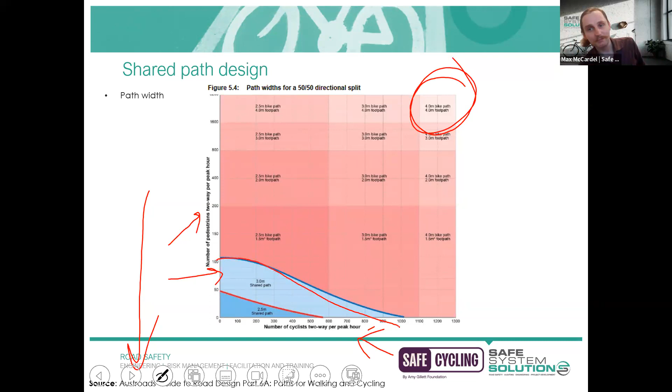Your shared path here is all this in the blue, and as you can see, it's relatively lower numbers where that could be seen as appropriate.

It's not quite as easy to measure as that. I do encourage you to flick through and review the types of definitions they've got in there, but you'll see it is generally quite vague. The idea is a local access path would not be considered to have a throughput of cyclist activity.

It's going to provide probably residential access. I guess you could think of it as similar to local streets. It's got that same kind of feeling to it.

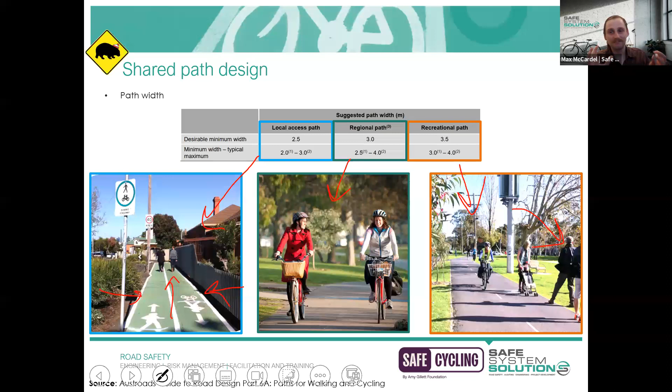But as I said, take all of these definitions with a grain of salt because they're not clearly defined and demarcated. So it can be used as a starting point, but it's not necessarily going to be able to solve which width to choose.

When we talk about the gradient, we're generally thinking about the uphill gradient, how comfortable it is for a cyclist to ride uphill. Personally, I'm a regular cyclist, and I tend to avoid routes that have lots of hills because I don't have the stamina for it. I'd go out of my way, do a detour to avoid a really steep section.

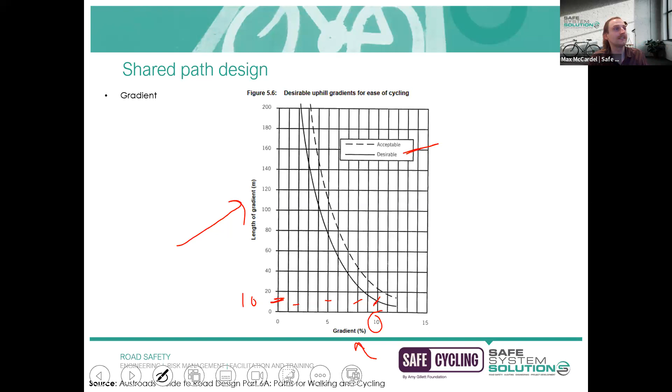A lot of speed discussion. Speed, yes. Skid resistance, stopping distance, visibility, sightlines. Pedestrian conflict points.

A lot of conflict. Yep, speed conflicts. All right, well certainly lots of answers there coming through, Ilsa. Yeah.

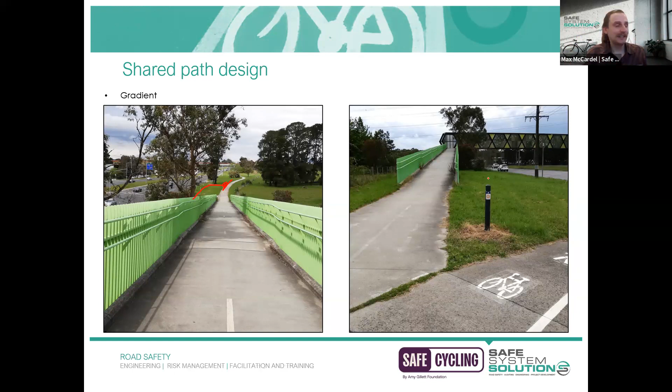So I wouldn't be surprised if, in future editions of Austroads and other guideline documents, we see wider operating widths to play with. These operating widths were designed based on what's considered an average bicycle, but there seems to be quite a diversity now on our networks as to what that exactly looks like. We've got cargo bikes, trikes and tricycles, recumbent bikes, and lots of different styles of bicycles. I'd imagine that would play a role in trying to redefine what this average bicycle looks like. For the time being, feel free to use this as a reference to help underpin any decisions you make within this space.

I should have mentioned this last graph at the bottom, to do with the speed of cyclists as well. Generally, if you're talking about shared paths, a 20-kilometer-per-hour speed is probably a reasonable assessment. At 30 kilometers per hour, they're probably going to be on the road instead. But obviously lower speeds too, for other users who don't feel comfortable traveling at that speed. I'd say 20 to 25 kilometers per hour would be a reasonable assessment for shared paths with cyclists.

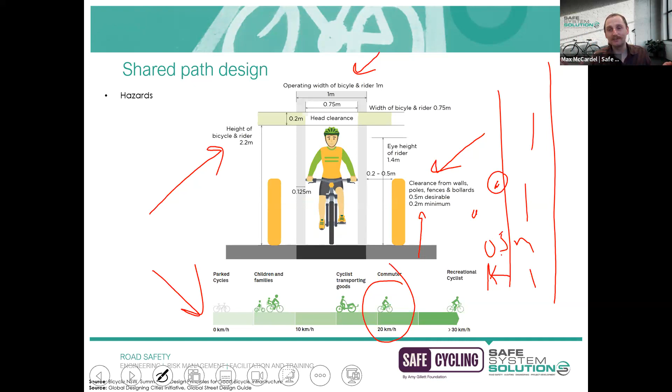The source for that second image is the Global Designing Cities Initiative. We haven't provided that one within our resources package on the LMS, because the Global Street Design Guide is set up so they like to see who's downloaded their guidelines - you have to put in your details and say where you're from. It's obviously an international organization, but it's really, really good. It's something like a 300 page, 600 meg document - really big, but completely comprehensive about what everyone around the world is doing within the cycling space and what treatments you can look at. So I'd strongly encourage you to download that one.

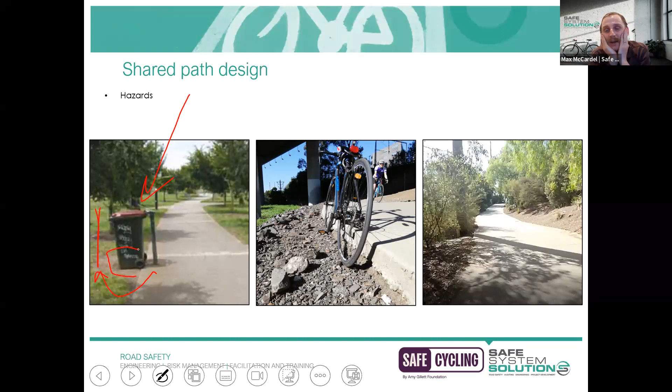Some common hazards we do see adjacent to shared paths can be roadside hazards, or roadside furniture - things like bins. A perfect example is where, if we'd just flipped this pole to go here and created a little bin outstand or bin bay, that could have helped reduce that as a risk. So that's a common hazard to find.

Another one is where the shared path's adjacent surface is not level - you might have a drop-off point. The real quick and easy fix there is just to ensure all your shared paths are batted up to the surface level so you don't have that drop-off, because if you're riding something with narrow tires, like a road bike, it's incredibly unlikely you'd be able to get back up onto that shared path.

You'd be in quite a lot of trouble there. The final one here is there's actually a utility pole right adjacent the edge of this shared path. So as a general rule of thumb, if we've done any risk identification and mitigating measures, things we want to be looking at is if we can remove the risk altogether—so relocate that utility pole or relocate the shared path to get us away from that hazard. Where that's not really feasible, you can look at going the next level down, which is trying to delineate or raise awareness of the hazard.

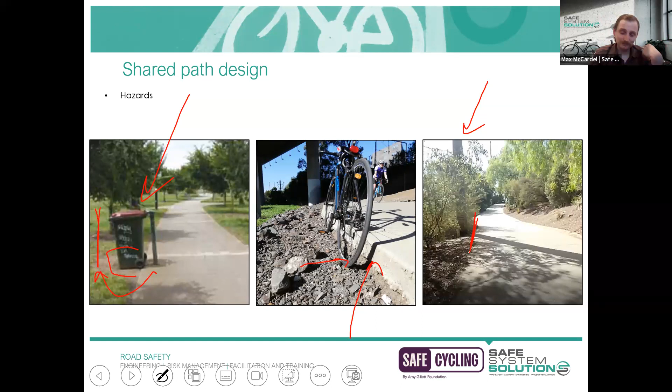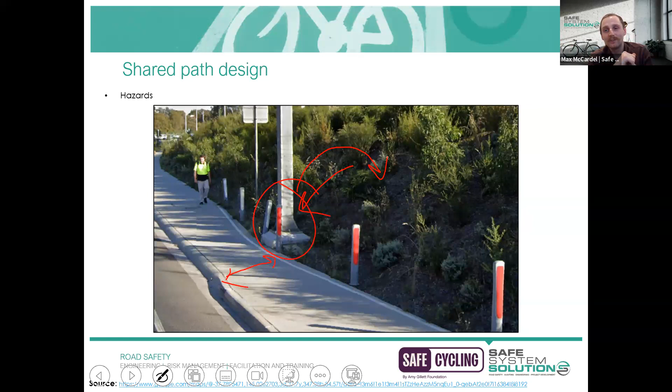Here's an example of how that could be achieved through the use of these flexible paddles or flexible bollards. This is a shared path, and as you can see, it has been narrowed here—there's a pinch point because of this gantry column. In a perfect world, during the development of this project, this may have been picked up by an auditor or during the design review process, suggesting we push this closer into the batter and build some retaining walls to keep all that earth back, just to ensure we can keep the shared path, because putting the paddles there and narrowing the path is certainly not removing the hazard. It's just making it a little bit more obvious.

Quite technical, this slide, and I appreciate not everyone may have seen sightline calculations before. The reason we include it is just to remind designers that there are actual sightline requirements and calculations for cyclists. For those that have had to do sightline calculations—minimum stopping distance, stopping sight distance, intersection sight distance—generally that's from the perspective of motorists or heavy vehicles in some instances. There are also separate calculations for cyclists, with very similar formulas though.

Things you'll be considering: what would be the speed? This is where you can jot down any of your assumptions. So as before, if it was a shared path on kind of flat terrain, you may assume a 20 kilometer per hour speed would be a reasonable assumption. You generally always take the worst case scenario, being wet conditions for the coefficient of friction, and the grade of the path needs to get factored in there as well. I'm not going to go through this whole thing—it's just to throw out there for designers as a reminder that we do have sightline requirements for cyclists.

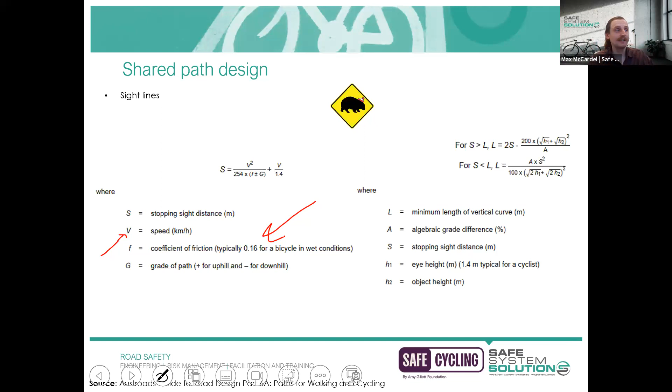And this has got to do with the horizontal sightline. I'll go to the next slide, which will explain why this is important. If you had a cyclist on the right of the screen there, traveling around a bend or around a corner, they do need to have adequate sight lines to be able to spot any objects or hazards that may be in their path, and be able to stop in time, basically.

Hazards could be a serious defect in the path, equivalent to a pothole. There could be a log that's fallen over. There could be a cyclist that's fallen over that needs help or attention or something like that. So that's the reason we perform these sight distance checks, is just to ensure we're providing that stopping distance.

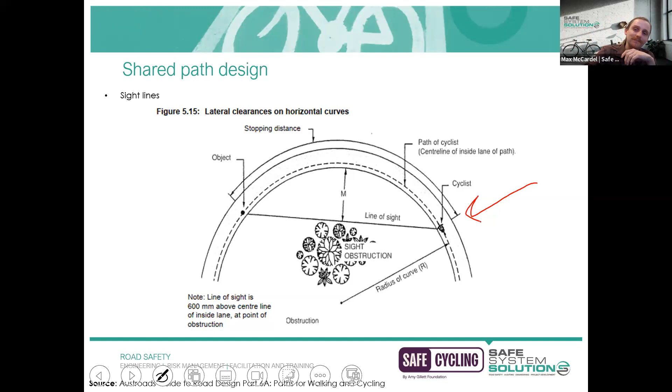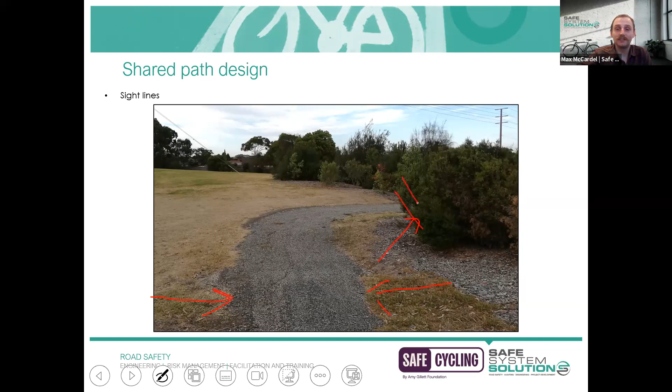As a real life example here—believe it or not, this is a shared path. It doesn't look like it, but this is sealed. And because of this vegetation here, it's quite difficult to be able to see around that bend. If you were traveling at speed and there was a hazard there, it could potentially be hidden by that. So a recommendation here would be to trim back the vegetation just to open up those sight lines.

Elsa, yes, we have a question about e-bikes. Someone's asked that with e-bike speeds now being about 25, should we be going for that rather than the 20? That's something you and I have briefly discussed before. What's your opinion, Elsa?

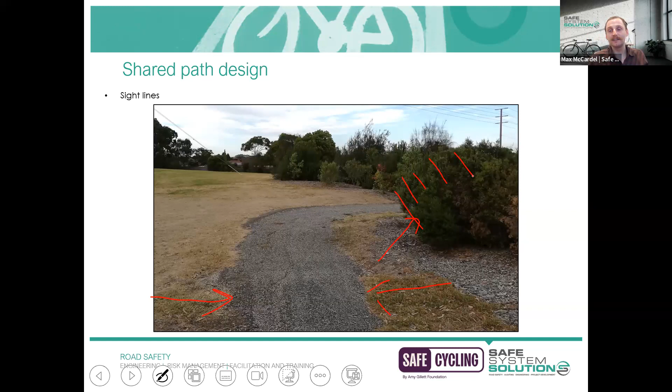It's tricky. I think in shared use paths, maybe that would be a good one to consider—two-way especially. Generally where you do have lots of e-bikes, you would see them taking that upper limit or going to what would legally be able to travel at. So I would agree if you're seeing those users within the space to perhaps go for the higher limit there, which will impact things like these sightlines, how much sightline distance you need to provide them. Thanks for the question, thank you, Stephanie.

Alrighty, we'll get stuck into fencing now. Once again, there are specific requirements as to when you should be installing fences. One is to do with what is the adjacent drop-off. So if it's a really big fall or a really small fall, how can we manage that? The other one is to do with the steepness of the batter. If it's like a cliff face that you're riding against, that's probably going to need a fence. But if it's just very flat land, obviously no fence required.

Just to run you through this, so you've got an idea of how this works, there's two categories of fencing, which in my personal opinion is overly complicating this topic. But they've got this idea of a partial barrier fence and a full barrier fence. I'll show you exactly what those two examples mean in a second. If we look at the left-hand diagram here, we've got this note of X. X is the distance from the edge of the shared path to where the vertical drop is situated. Then we've got the dimension Y, which is what is the vertical fall, the drop.

We can see in the first scenario here, if X is less than 2 meters and Y is less than 250 mil, it's saying a fence is not required, with the asterisk saying instead what you want to do is batter off the surface. So instead, just get some fill material and fill that in. Don't worry about a fence, just fill that in. Pretty pragmatic solution there.

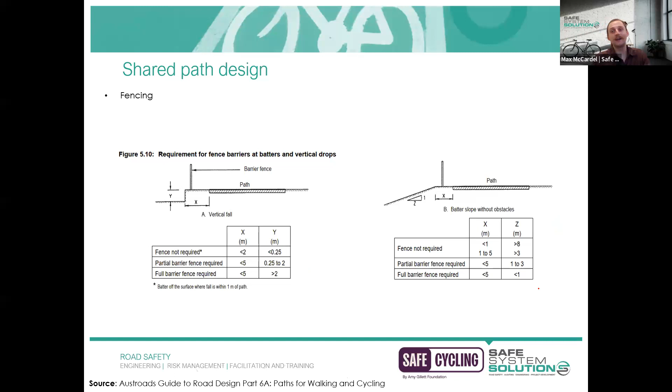That smooth rail, or smooth deflection rail, is intentionally situated about 1.2 meters to 1.5 meters, which is roughly a cyclist's elbow to their shoulder. So as you're riding along, if you were to become errant and strike this fence, your shoulder to your elbow is the part that's going to hit it, not your handlebar and not your wrist that could then get snagged on any members. It's deliberately designed at that height to maximize the chances of a cyclist staying on their bike and hopefully continuing to ride along, as opposed to getting snagged on any vertical members or losing control and stability. So that's often referred to as cycle-friendly fencing, but it's just this idea of one smooth, continuous rail that juts out.

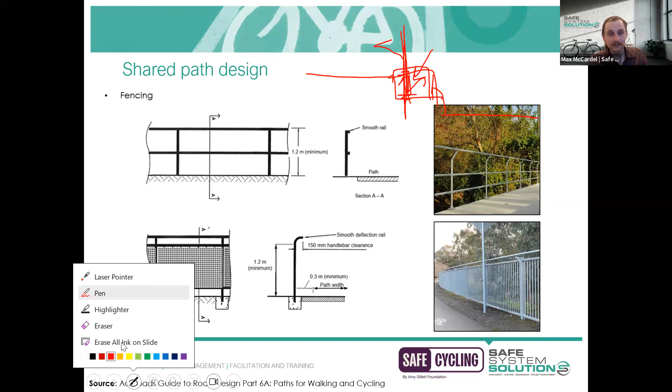I can see another question came through about entry and exit splays of fencing, which is a very good idea. For those not familiar with the term, if you're on a shared path and draw a straight one like this, with a fence relatively close to the edge of the shared path there.

If you kind of deliberately put it parallel to start with, it can have this effect for cyclists where if you're riding up here, you actually want to veer away from it. The term used in road design context is the shy line effect.

Barrier systems on roads tend to have this splay as well. It's the same kind of principle here, where you'd provide a splay or angle the start or end of the fence treatment off a bit, so cyclists don't feel the need to veer out of their lane or away from that feature and potentially encroach into other spaces. So yes, that's a very good consideration.

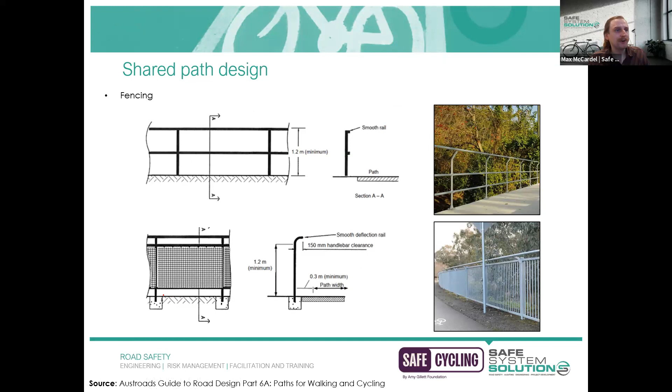And yes, I can see the sign in the bottom photo isn't in a great spot. I agree with you, Craig - good pickup, I was going to mention that. This sign here is very interestingly installed on the shared path side of things.

So theoretically, if you were riding and collided with this fence, engaged with the smooth deflection rail and run along that rail, you'd collide straight into that sign. That's not a great positioning. Instead, any of that furniture - signs and things - should be put on the other side of the fence, so you don't get careened straight into another hazard.

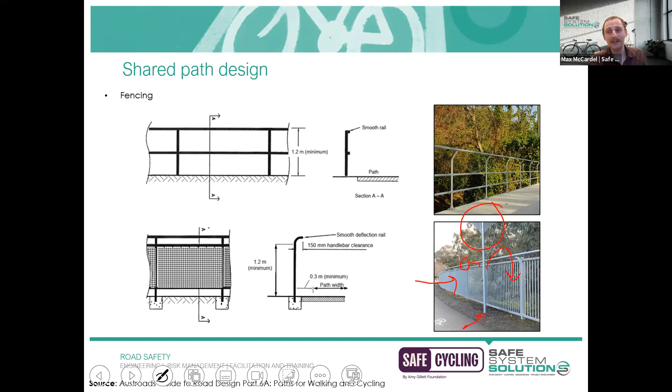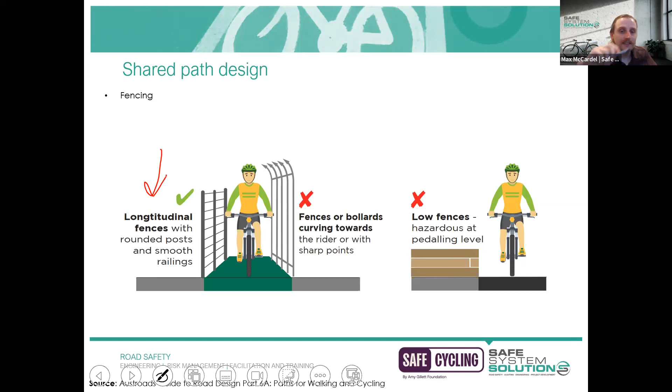I'll go through this last slide and then we'll pause for a break. So last little point on fencing - we've already talked about longitudinal fencing. We want to make sure we've got smooth rails and things like that. We don't want to be using any fences that curve towards the rider or have any sharp points.

There are examples where they curve outwards - it can be a nice architectural feature. For those that curve outwards, the need for a smooth deflection rail isn't quite as significant, because it's less likely you're actually going to strike that. But TMR have got some information if you're after more detail on when to apply specific fence types - there's a lot of information in the TMR document.

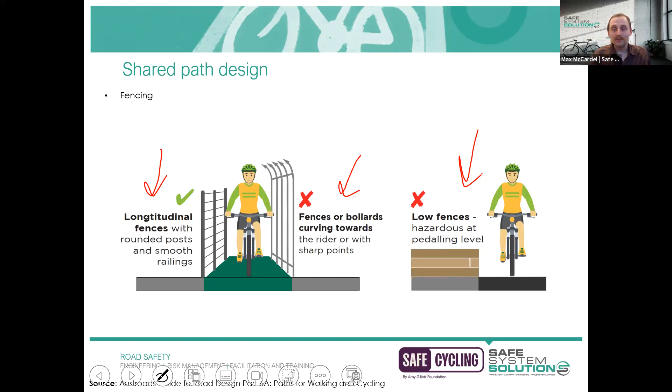The other example I wanted to mention is low fences. Things like planter boxes are a really common one - they can actually be a hazard for a cyclist's pedals. Around the 200 millimeter mark, anything above that is considered a pedaling hazard, which can cause a cyclist to lose balance or become destabilized. So that's something to also consider - anything within that space could be deemed a hazard.

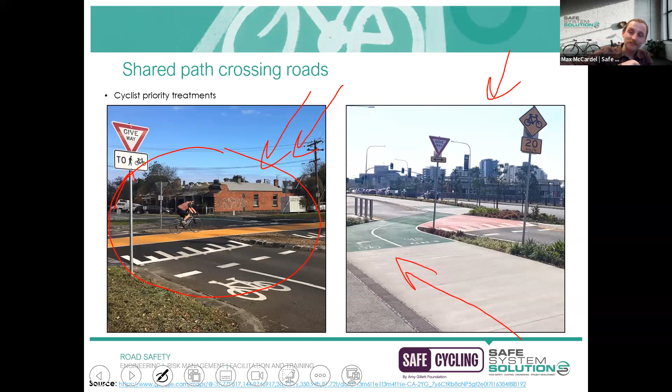If you imagine riding in the right-hand example and a vehicle was also traveling in the same parallel path direction, they may not necessarily appreciate that you're about to cut in front of them and go across them. So that's one aspect, the cognitive work involved. But also, if you were that cyclist trying to turn right and look over your shoulder to spot any motorists traveling at speed who may ignore the give way sign, it's just really, really hard to do.

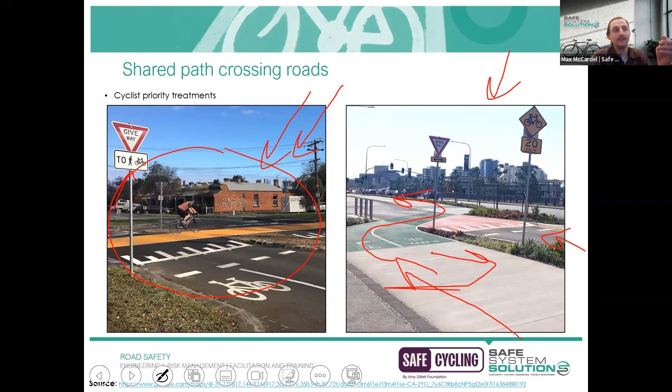So perpendicular crossings, where possible, are much more attractive. I appreciate there were lots of site constraints with the Bicentennial Bikeway, so I'm not trying to say this is a terrible example, but just wanted to demonstrate how those angle changes affect the safety for cyclists. This is what this particular crossing point looks like out on site, and you may notice around that conflict point you have lots of skid marks or braking. It kind of tells the story that perhaps cyclists are slamming on the brakes at this location because motorists are traveling through without giving way, or maybe the curve radius is too tight, or whatever reason. But I think that illustrates the point that if you're able to provide one continuous passage for cyclists all in the same direction, it's just a much more comfortable ride.

Ilsa, I think a good question came in: do you think there's any risk that vehicles might confuse the path on the right and maybe veer into that area because it's so flush with a flat top?

That's a very good point - let's give a prize out there. That's something I think would get picked up within a road safety audit, where you have to consider all the risks associated with these features. So you'd be thinking about it from the cyclist's perspective, from the driver's perspective, and yeah, that risk of a motorist potentially being like, where does my path go? Do I diverge there, or am I continuing straight?

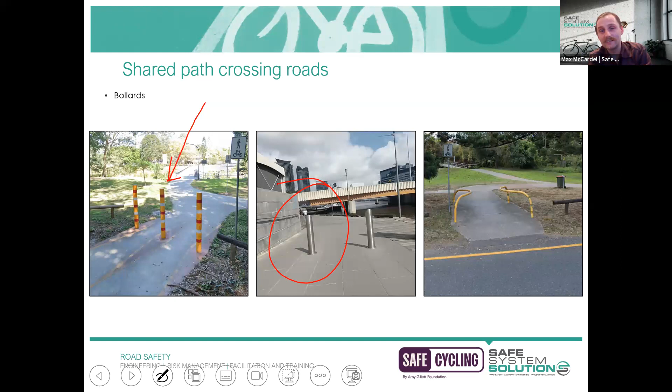An example of that is this middle photo that I've taken here, where we've got bollards. You obviously can't tell where this is contextually, but it is well and truly off-road, there's no carriageway near this at all. From my understanding, these have been installed purely for rubbish collection vehicles, so they don't progress any further. They may be accessing the adjacent esplanade area but don't want them traveling any further.

I think that's a real example where instead of implementing these fixed hazards, this particular example is very difficult for cyclists to see, it blends in with the surrounding environment.

Instead of going for that approach, could we instead ensure that all contractors have their routes approved, with either a map to show exactly where their route is and where they are not allowed to travel beyond? Could we geofence the area so physically they are unable to travel any further than this point, or use some other means to demarcate that?

Because I think a really good way to think about these hazards is the bollards. If you were to install them in a traffic lane, no way, obviously you couldn't. And yet it seems absolutely part of the mainstream, or just common practice, to install these at the end of shared paths and bike paths, and it's just accepted that that's what we do. I just wanted to iterate the point that you should be having a very strategic think about these things and really consider if they are required at all.

I have seen much tighter being used though, and that's probably an example of one where the intent is they don't want mini bike riders or monkey bike riders, motorbike riders, to access the shared path, so they've really tightened that up even further. Coincidentally, that 1.5 meter, remember, is actually our operating width for a cyclist as well.

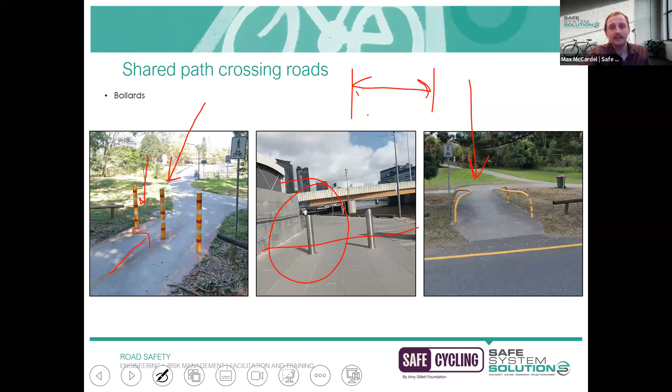A few more examples of our bollards there - timber bollards, and you can have these chicane treatments, which I think can also be quite effective. They do certainly slow down cyclists, where if you've got a significant hazard, if they're approaching an arterial road for instance, that can be a good way of doing things.

I've seen a lot of these chicanes though, where the actual design path may cater for general cyclists, but any of those larger bicycles - cargo bikes, or if you've got a bicycle trailer with a little kid in the back, or a little dog - anything like that, those chicane treatments can actually not be wide enough to enable movement through for any of those longer cyclists.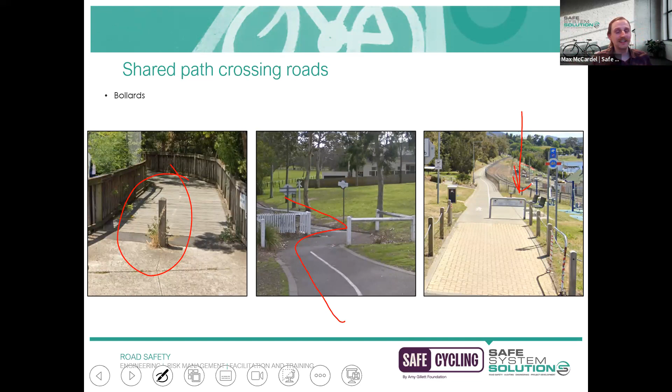So something to be mindful of. This last example is in Hobart, where it's kind of this idea of just putting up a little hazard board for cyclists as they're entering the CBD along this shared trail. Once again, I have that same theory where you would never do that for general traffic, where you just close off their lane and say, be careful, you're approaching something more significant. We've got to start thinking of other solutions, and one example that I'll hop into in a minute, but I'll talk about why this is so relevant.

This is a bollard installed on the bike lane that Ilse just mentioned at the start of today's module, the Upfield bike lane. On the left-hand side is what it looked like when this fellow collided with it. He rode straight into it, came off his bike, and had some facial injuries and a broken wrist. Council came out the next day and gave it a little facelift with some spray paint and fresh delineated tape.

This fellow was injured on the ground waiting for the ambulance to arrive to get taken to hospital. Within that 40-minute period for an ambulance to come, he witnessed 2 other riders hit that same bollard. So whilst we have a record of this particular individual attending hospital for treatment of injuries associated with that infrastructure, we have no records of the 2 other cyclists, because cyclist injuries are incredibly underreported.

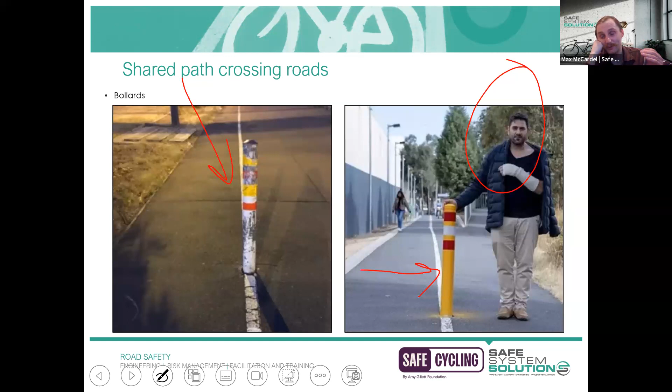Cyclists don't know if they are able to report that, or who to talk to. Bollards are actually one of the things a lot of cyclists can talk to and attest to actually striking. And you may be thinking, for those that are not cyclists or really within their space, it's a giant hazard, how could you miss that? Well, a lot of the time when these shared path networks get busy, you could just be following a cyclist in front of you, and they can completely block a bollard. So potentially they could be riding straight into a bollard and then veer out at the last second, and you may have no idea what's going on. Then in a split second, you're colliding into something like this. So it's a very common injury type and something that is incredibly underreported - just be mindful of that.

Okay, so what could we do instead of bollards? Similar to how we treat our road network - if we go back to our road transport engineering, traffic engineering design toolkit, something that might be familiar is this idea of a splitter island. We could also look to implement splitter islands where we have shared paths approaching any of our roads. You could use concrete curbing and infill materials, or vegetation and landscaping. You could use a bollard within that space, assuming it's got adequate clearance from the edge of the bicycle lane, just to help deter any entry of motor vehicles.

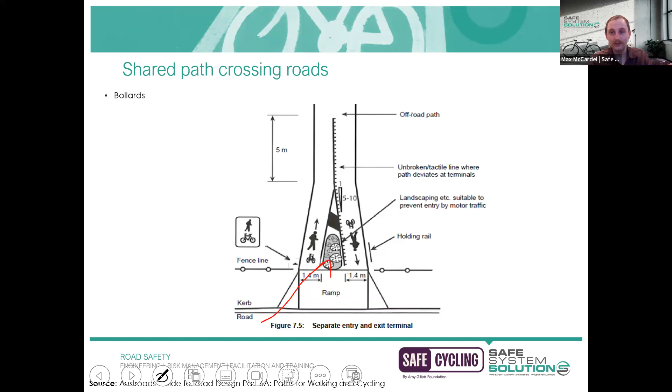But this solution here, taken out of the Austroads guide, I think is a much more elegant solution as opposed to just putting in a bollard because it's quick and easy and you don't have to worry about it. This idea of using some landscaping makes it a little bit nicer, and it also helps emphasize to cyclists that there is a change in their path conditions - they're approaching a road and need to be aware of that. So much more in favor of something that looks like this.

Here's an example of this in practice, where these 3 bollards have been implemented in a splitter island of sorts, in a grassed verge. The idea is to deter vehicles entering the bridge here. If a vehicle wanted to do that, I'm sure they could, but it helps deter that movement. The thing I like about this particular example is those bollards actually have solar panels on top, and the bottom of them light up at night, so they become very visible and help demarcate that area during low light conditions.

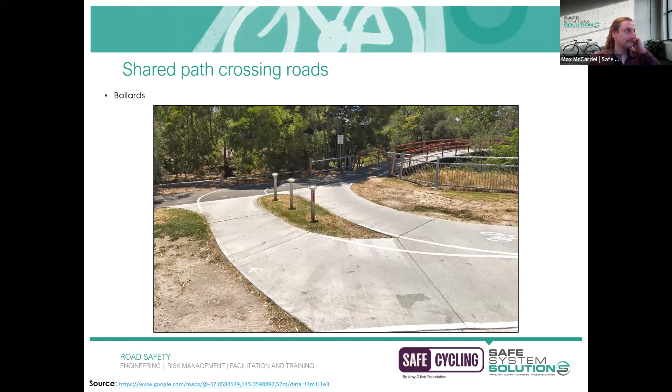Okay, I wanted to articulate a final point on the shared paths where we are crossing roads, that we still are required to think about our DDA requirements. So for those not familiar, the DDA, the Disability Discrimination Act, it's an acknowledgement that people with disabilities, mobility issues, or vision impairments require additional features to help them understand they're approaching a carriageway. All of those features are still applicable and relevant with the raised crossings that we've shown.

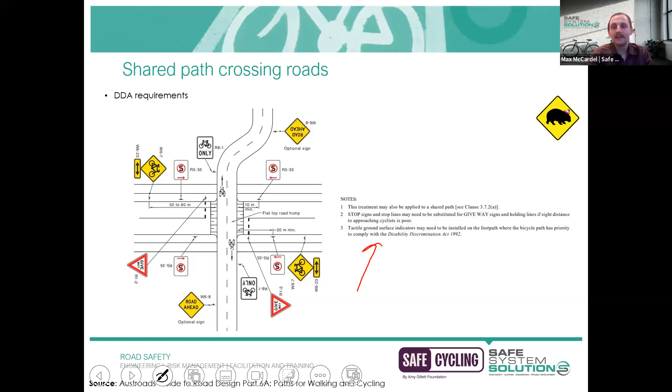So the tactile ground surface indicators may need to be installed on the footpath where the bicycle path has priority, to comply with the DDA Act. So that is still a requirement. For those unfamiliar, it's just those little braille dots that you see adjacent a vehicle crossing, so people with vision impairments can get a sense that they're approaching a carriageway. So yes, something to be mindful of.

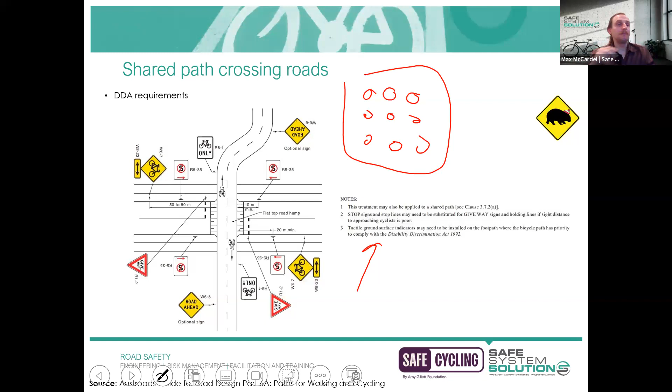Okay, I'll move on to our next section, which is shared paths crossing over shared paths. Before we had shared paths crossing over roads, but I wanted to ask the group, what do you think is wrong with this photo? I've got a very confused looking cyclist there, and any idea why this cyclist might be confused? I'll get the cyclist out of the way. You can have a think about what I'm trying to get at. So what's wrong with this photo?

Lots of give way answers coming through. Wayfinding signs are not present. Priority for who has right of way. Wayfinding, right of way, keep left. I think the majority answer is right of way. Very good. There's no lighting as well. That's a good answer, lighting. No signage.

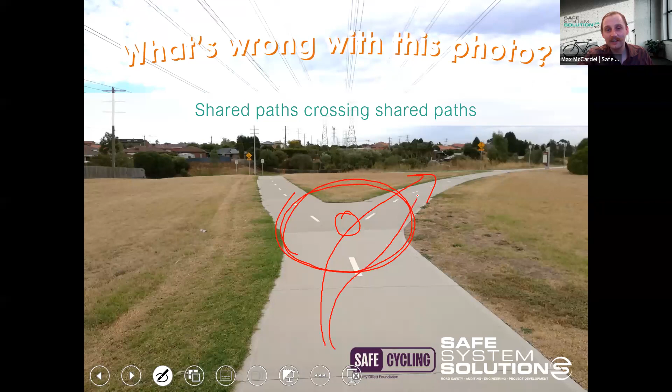I would welcome anyone in the comments if you have seen a roundabout purely for cyclists. I'm not sure how well received that would be, particularly for cyclists that want to turn right, because I think it would be incredibly common to cut the corner or go against the circulating area and just use the most convenient movements, which would really impact the effectiveness of it.

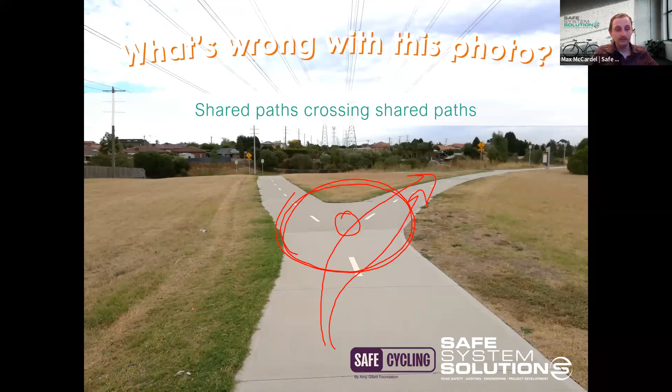But yeah, I'm open to the group. If you do know examples of a roundabout that's been installed for cyclists, I'd be very interested—apparently Canadians do it, so you can check that out. I'm actually heading to Canada Friday week, so who knows, maybe I'll be changing my tune in a matter of weeks. But within our context, no, I haven't seen that as an example, but something that could be looked at.

So I did want to have a quick conversation around wayfinding signage. Austroads has released a research report on bicycle wayfinding. In my opinion, if there's some kind of jurisdiction that presents guidelines, like that's their job. The fact that they've nominated to invest time, money and resources to develop a specific document about bicycle wayfinding illustrates that it's a pretty significant topic that needs to be addressed, because the way we do it in Australia is really dependent on where you are across the nation. We don't have one homogenized demarcation or street signage system.

Instead, it's taken on an LGA basis, which isn't necessarily the end of the world. All you've got to be communicating is, particularly if cyclists are on the same corridor, making sure all of those signs look consistent, the information conveyed is legible, easy for them to read. If they're following a sign telling them they're heading towards a library, that's reinforced at each intersection. These are basic principles demonstrated in this research report, and yet it's something we're not the best at within Australia.

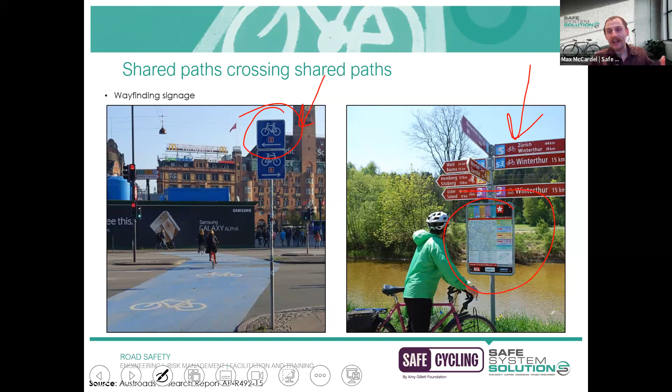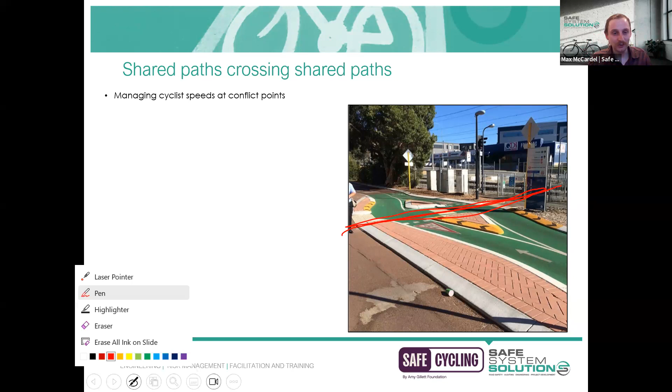So what the designers opted to do, rather than just treat this as a shared path where pedestrians are meant to be there, was acknowledge that we've got significant volumes of pedestrians, and cyclists may not be expecting that. So let's try and communicate that to them through the infrastructure. This is where we've got things like our splitter islands—similar to what we're thinking with traffic engineering, just applied to cycling.

We've got green colouring, we've got 'give way' stenciled in there as well, so cyclists know something's going on here, something a little bit different. We've got this curbing here as well, with the kind of chevron arrows. All of this is communicating to cyclists that there's a change coming, something different about this shared path.

I think this is one way to have gone about it. I'm opening up to the chat if you could think of any other interventions that could have potentially been implemented at this site to help communicate to cyclists that they are approaching a pedestrianized space. Do you have some guesses already coming in?

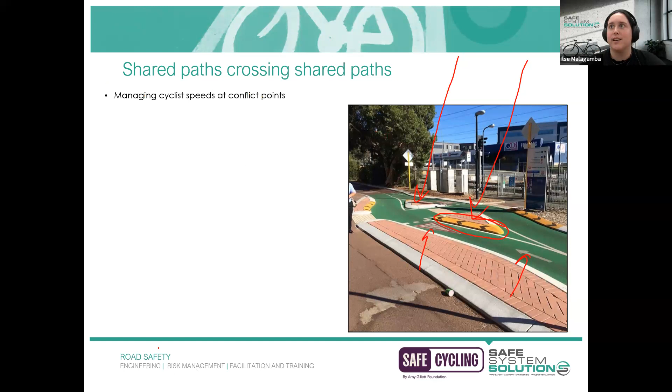Someone has suggested raising the pedestrian crossing, perhaps including some zebra line marking, maybe putting the give way sign a bit further back to give more of an advanced warning. Yep, zebra line marking. Yeah, grade separation, change in pavement, maybe putting some brick in to distinguish the crossing - very good, better. And a bit of a speed hump.

You would probably have a similar issue on your Upfield bike path rides, Ilse, with crossing pedestrians? Yeah, there's a few areas where there's really poor sight lines, and usually people just ding their bell really loud. Yeah, okay, and the solution is make sure the pedestrian stops, and everyone gets a loud bell. Yes, pretty much - not great.

Yeah, I think there's some really good treatments there. That's really exciting - a lot of these cycling interventions certainly do stem from that traffic engineering space, so we're just scaling things down and applying them within this space. The prize I'd like to give out is the suggestion of raising that section, similar to how we spoke about cyclists crossing roads where they've got priority - we raise the shared path so they've got one continuous movement and we're forcing vehicles to slow down.

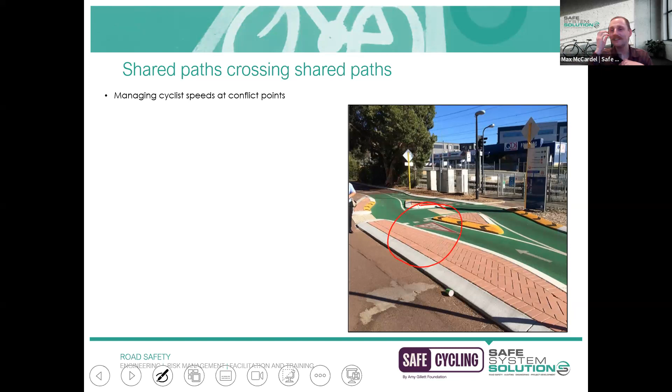Instead we're saying, let's give pedestrians priority. Let's raise up the pedestrian section, force cyclists to slow down, so provide a ramp, like a speed hump or something like that. Once again, giving much clearer visual cues that pedestrians in this area have priority and cyclists need to slow down. Because the thing with all of these little symbols on the ground - another example is these little pavement markings.

They can only be seen within a snapshot of time to cyclists. They're very difficult to spot 20 meters away - it's basically only when you're right on top of them that you see something that says give way or slow down. And even give way signage, while it does to some extent help communicate intent to cyclists, it's not uncommon for cyclists not to see that signage because they could be focused on other hazards around them, or on other shared path users.

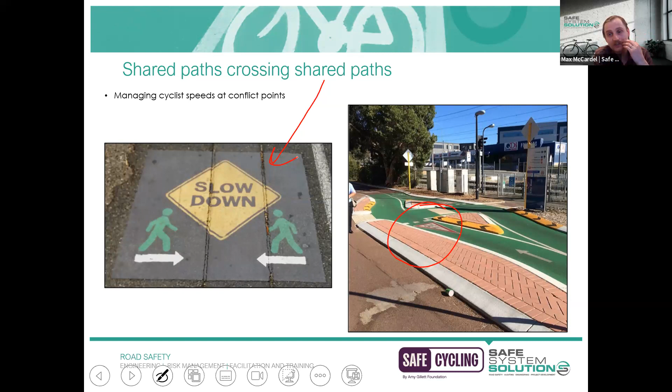So things like that can be missed. If you were to provide vertical deflection, a ramp of some degree, something that physically slows down cyclists, then even if cyclists miss the signs, they're going to be slowed down, which is probably going to alert them that this is a change in space. So yeah, just another solution - I'm not trying to detract from this particular infrastructure, just wanted to show it as an example.

That is the end of today's slides. Now, I was going to run through the LMS, but I'll just touch on this final example as we're ending today - talk about the ending of a shared path and what not to do. It is certainly more advanced than just putting up a shared path end sign.

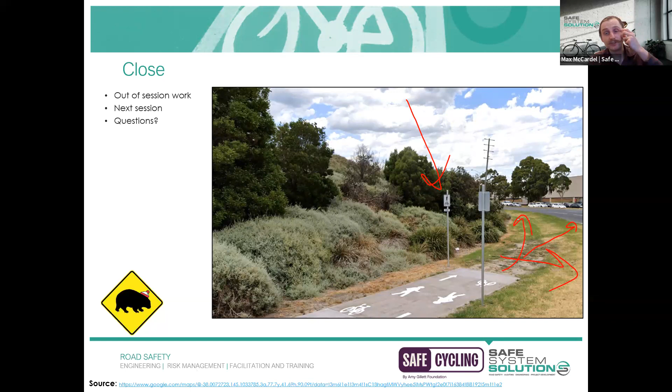I just wanted to go through the LMS - this is our learning management system.

Marissa, did you want to run through it, or are you happy for me to just do it? Yeah, up to you, I think I'll just do it. I've got to keep going.

Introductions - if you want to say hello to any of your peers and other participants, please jot down a brief introduction of who you are, where you're from, and your level of experience within this space. Welcome any photos of you as well, that'd be great.

All the resources were saved in this little tab here - all the course information, all the reference documents that we show within the slides, so all the Austroads stuff, all the different guideline documents and things like that are saved within there.

We also have, as I mentioned, the Global Designing Cities Initiative. We don't save that resource - click on that link and you can download it yourself.

If there's any resources that you would like to share with other participants, we've provided this tab. So if there's any particular academic research that you're aware of or any jurisdictional guidelines that you think are relevant, you can just drop the files in there.

Today's module was all about off-road cycling. We've got the module 1 presentation slides in a PDF, which is there. We've got this link here, which takes you to a 360-degree video - we're going to ask that you watch this before our next session, which is on Thursday.

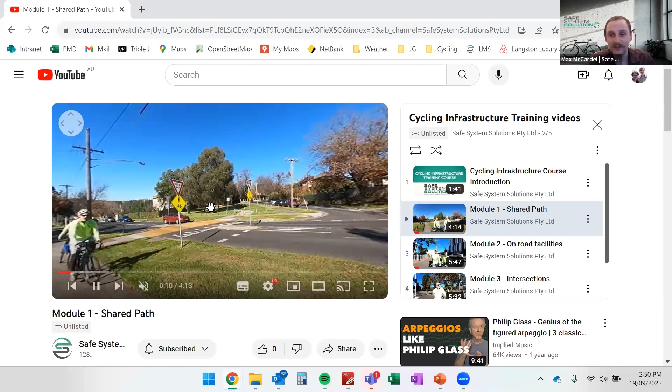What this is, it is a video - if you're on your phone, you can move the phone around and it'll go into a 360-degree view. You can also just click and drag your mouse and it will take you a full perspective of all of your surrounds there, similar to Google Street View. There's Ken and myself having a bit of a yarn, and you'll actually get to see what it's like riding through different environments.

For those using their computer, just remember you can use the mouse to scroll around and have a look. We will get you to, if you've got time after today's session, just get straight into that video - it's only 4 minutes or something like that.

We'll also get you to complete the quiz - the module 1 quiz, you can click on that and attempt it now. As I mentioned, there's 3 attempts to get stuck into that, but if you're having any questions or difficulties with that, please just reach out.

Anything that I missed on the LMS there, Marissa? No, I think you've covered everything. We do have someone that's querying - if you could go back to the, sorry, if you could share your screen again, Max, and just go back into the introductions. Someone's just said that they couldn't see a spot on where to write, so if we could just show how to pop something in there.

Oh, we don't have it either. Okay, alright, let me just fix that one up - there should be a little, yeah, there's usually a section down here, isn't there, that says you can add in, yeah that's right. So let me just work on that behind the scenes - there might be just a little IT setting that's gone astray there, so I'll just fix it up behind the scenes and you'll be able to pop in something there.